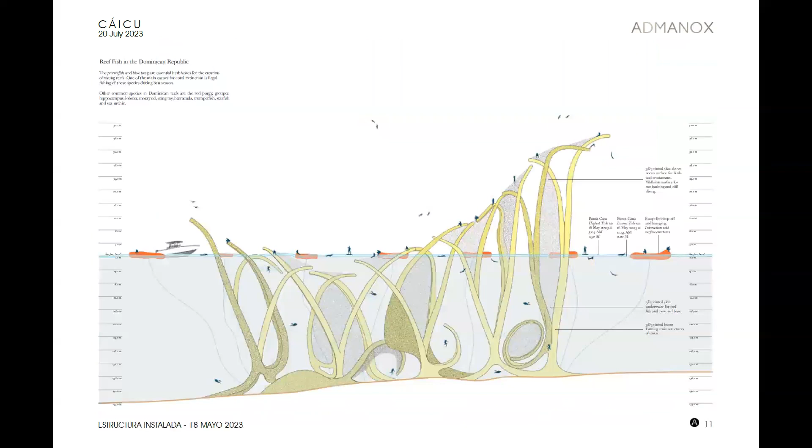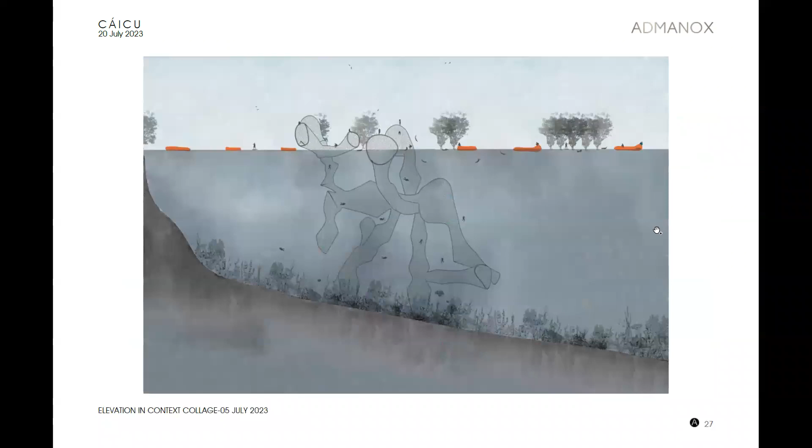All of this we've talked about before, so we can go straight to the new concept exploration where we've changed the main form, and I've started exploring the skin as well. In the future, you can add a hyperlink to the index so we don't have to go through all of this.

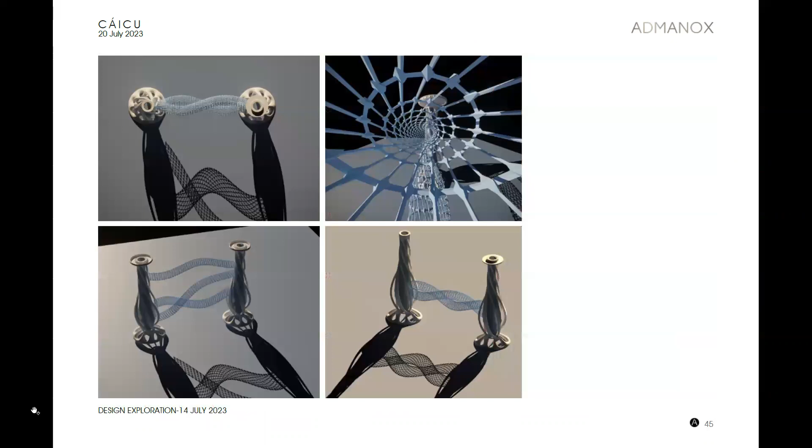So yes, that's one of the examples we've looked at, which is a platform. It's a temporary platform, was in Malta. It's called the AntiRoom, and it's a very light, floating platform on the water for swimmers and divers and people touring the area.

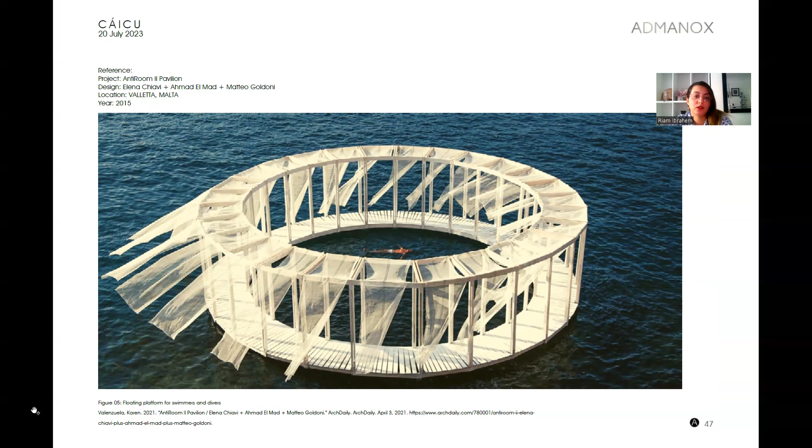And it's made out of timber. If you go to the next page, you'll see the actual structure of the model. It's made out of parts, designed to be light and floating above the water, attached to each other to make this circular platform. This is kind of what we're looking to get to in terms of the platform we want for the installation.

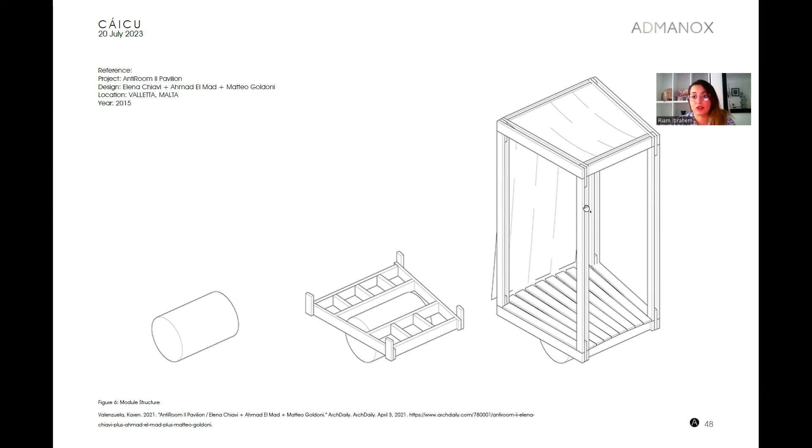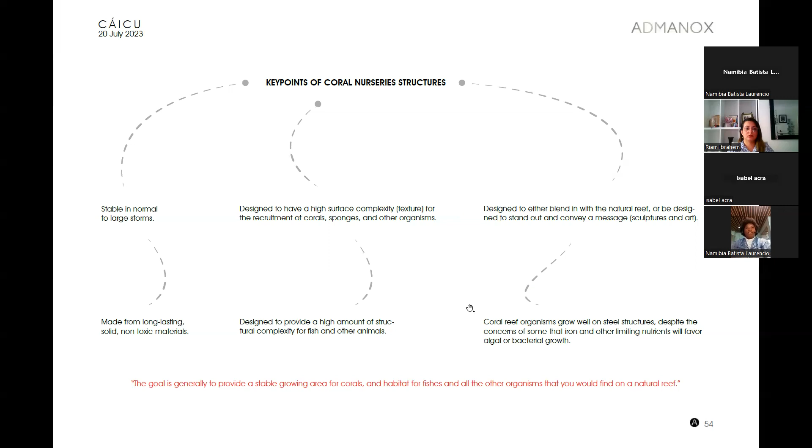The structure also has to be designed to have a high surface complexity, mostly for the different types of animals, organisms, and corals that are going to live there. Also, the structure must be made with materials that are non-toxic for the environment. Those are some of the key points.

Well, after this research, we made a few design explorations too. In this case, this is the platform design process. For the platform, we started with 3 modules this time, the first 3 modules, each correlated to each other. Here the first 3 show the process of how the result comes, also the dimensions it has. On the left and the right, there's a graphic showing how each module could be united from the combination of 1, 2, and 3 of them.

Even though the 3 have similar shapes, each has its difference, especially on the sides, the left and right sides, because this will be the space where it's going to be attached. So each module has its own characteristic and its own angle, to be able to be attached in the future.

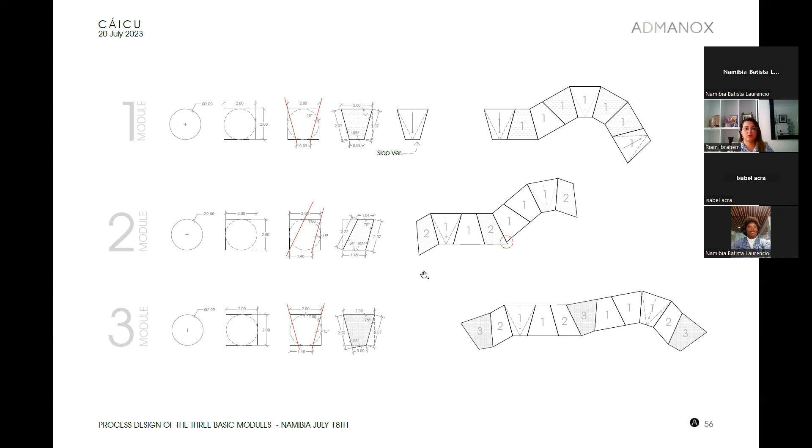So here is a detail of the last image, where we can see how the module is created, the basic module, because this is the first step. So we're going to keep exploring more and have more detail on how we're going to work, because this platform will be floating. So this is just the first phase for this.

Something important about this one especially is that one of them will be flat, but others will be sloped too, so people could swim or jump into the sea.

A small interruption: slope is with an E at the end, but also slopes. Okay, sí, slope tiene E al final, but also.

So you're doing this, and I think we're looking more at something that maybe becomes sloped, and then this is under, let me draw it here so that you don't model it. That one slopes, and then this one's underwater, let's say, like shallow, like a pool entry area. And then this one is sloped again. I think to have those, it would look something like this.

Like if you're doing an actual drawing. Oh yeah, I remember, I did a sketch. I'm going to add it here too, because I remember from the last review about how the same platform we're going down and again continue up to the surface.

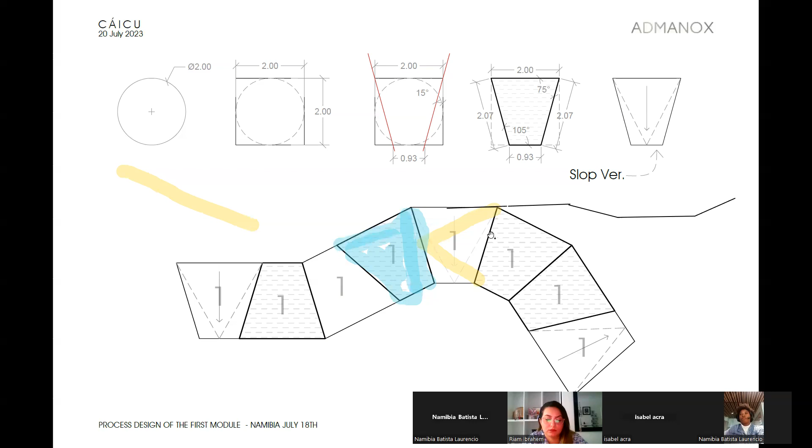So I have so many more, and then this is the other ones over here. But then in the deeper, lower one, you have this natural pool, let's call it. You could sink there and just chill there and be inside the water.

Okay, well, now that you say that, it's important to notice that the dimension we chose for this model is 2 meters by 2 meters. But this is just a representation, and because it's kind of a regular polygon, it could be bigger.

Depends on the activities, I think we can explain that we can scale it up. I mean, the way that we're doing it, technically, you could just scale it up and in some spaces have them 2 by 2, and others you can have them 4 by 4. Exactly, it's a matter of scale depending on where you add it.

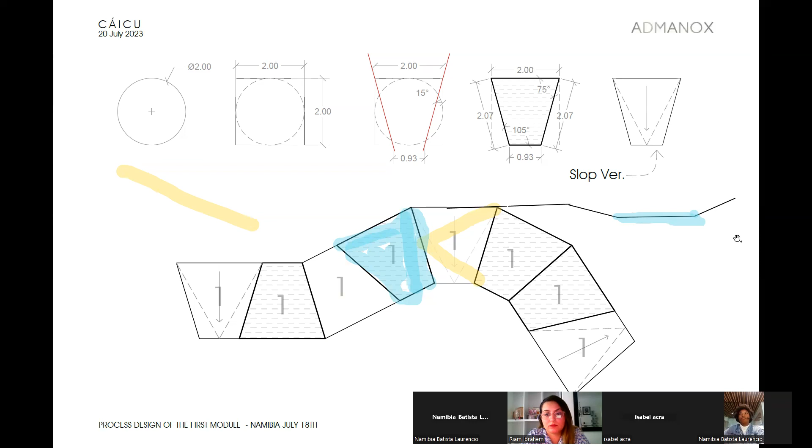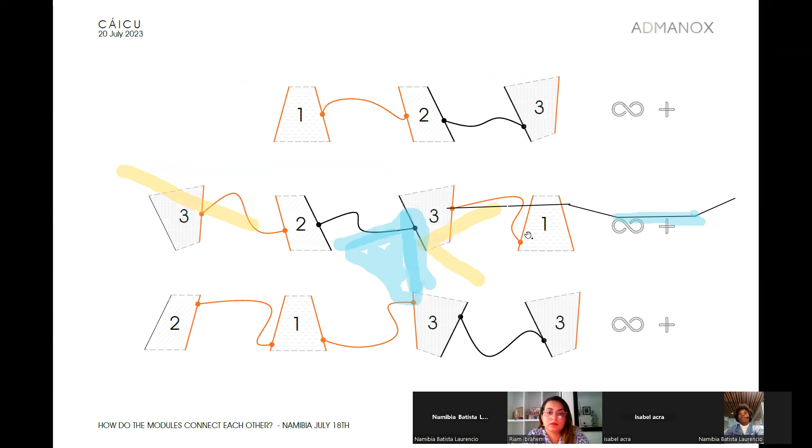So here is the second one and the third one. After this, thanks. So in these graphics, we made the logic of how the modules will connect to each other.

In this first phase, we identify each side, because each side, the orange and the black ones, has different angles. So each angle has the ability to be connected. But for example, module 1 can't connect with the black side of module 2 because it won't match. But each one can be matched because of these colors.

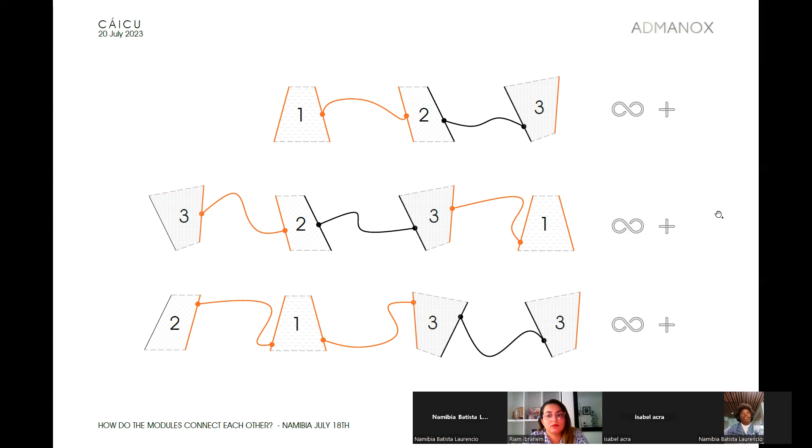Finally, here's a representation of a possibility of how this could work on the platform. This circle represents just the vertical drop. It won't be like a circle, but it's just a representation that this platform will be connected to the vertical drop in some points. The second circle is a projection of the platform—in this case a circle, but it could be any form, just the projection of it. Each module will be organized based on the projection that we want to recreate.

This also represents how each one is connected with the colors and the differences between each module. Also about the slope that we talked about before. Here is some representation of how it looks in the first phase, but after Isabel's observation, we're going to change that a little bit more.

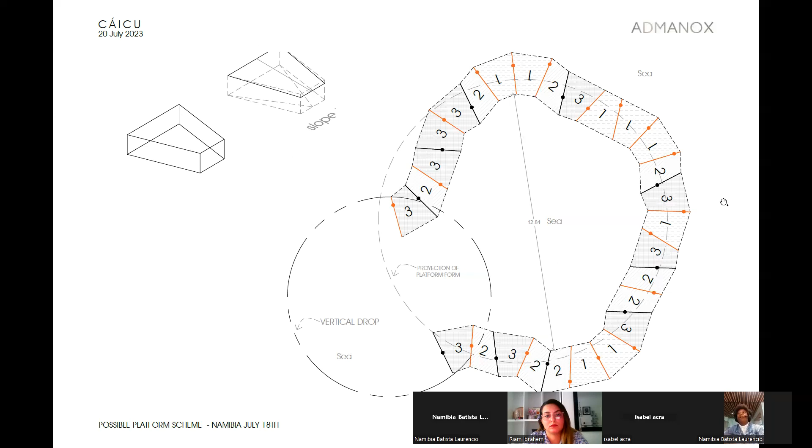So this is what I've been working on. It's modeling the pattern. Still working on that—that's the last one. This is the last one that I did.

So the task was to create a sample, 1 meter by 1 meter, just to have a go at the beginning. I still need to send this to the group and get feedback on whether I understood the task correctly or not. But that's the actual pattern of the tracing, and that's the modeling part of it.

So what I understood was part of the exercise—this is good because you traced the pattern. What he was trying to explain was like, in a multi-layer dimension, let's say, you have this here, right? And what happens on a second plane behind this.

So the skin wouldn't be just flat. This is why I also say that we're going back a few steps to the original skin, because I don't know if you remember when we were talking about this—let's say if you're looking at it in section and you have a straight line, sorry, I forgot, and this is the skin, then you would be able to have...

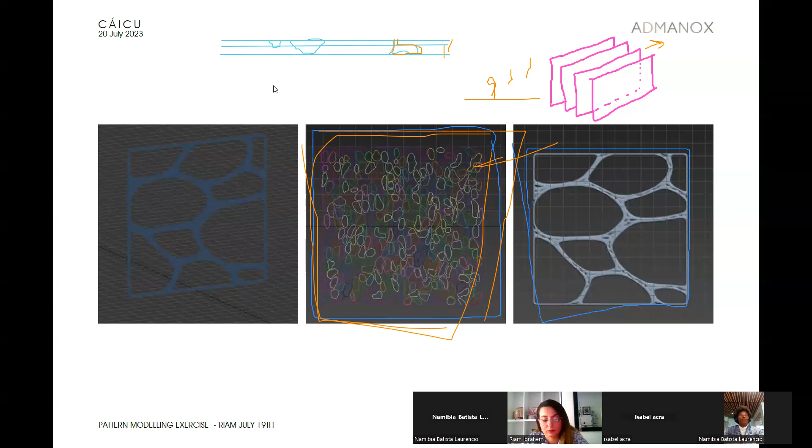Done. But yeah, I think that now that you have the skin, maybe you can add some, I don't know how you're gonna do this, in Rhino it's easy to do something like this, but I don't know how you do it here.

If it's easier, then I will just move on to Rhino, because you used Rhino. Yeah, I used to, I don't have it. I don't have it either.

But I feel like making this, you know how you have this plane and then you have openings, right? I think that when you draw this, it is easier in Rhino to shift, to make this plane with the holes.

The problem is that yesterday when I said okay, he mentioned something about, okay, this is not the step for extruding or Boolean-ing yet, so we don't do that yet. It's about, he wants to go to the first step, that's what I understood from it. So that's why I'm not progressing anymore until.

No, I understood. The only thing is that I did understand that the first step involved multiple layers. Yeah, I can just copy it, if you want. You can just copy this and shift them and send that, and see if he tells you how to go on forth with the Booleans.

And extruding and everything. Yeah, okay. I think it's good for now. Thanks, thank you Namibia.